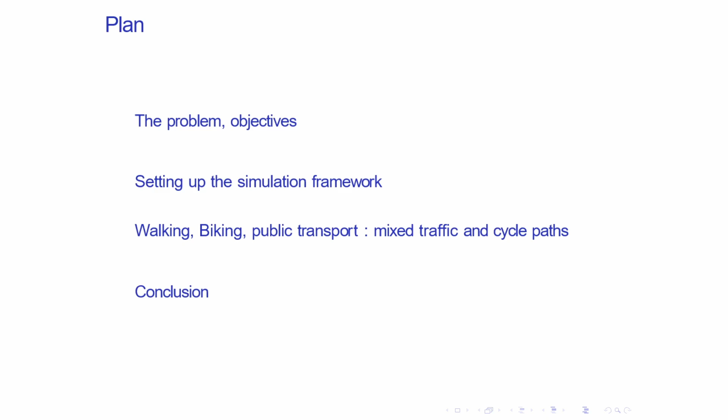So for this study, I will start with the problem and the objectives. Then I will identify the different steps to create a microsimulation transport model. Then I will evaluate the effect of a base case scenario on congestion and of the active modes and the public transport on congestion and emission.

Lately, it has been noticed that the use of private cars became more and more excessive, which makes road transport one of the main sources of fine particle emissions. This is why several cities around the world are regulating the access to the city center, mainly to create low emission zones.

To study this type of problem, nowadays, transport modeling and simulation became more and more valuable tools for planning urban areas. As I'm interested to study the micromobility, including active modes, public transport, and intermodality, the microsimulation has several advantages here.

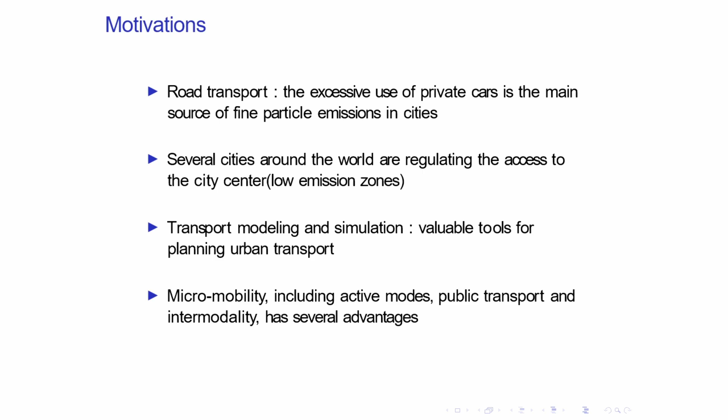Thus far, and at the international level, we have that most urban trips are short distance. For example, in France, 40% of trips are less than 3 kilometers, where 10% are less than 1 kilometer. The use of cars for this type of trips is not desirable, and this is why we encourage the switch from the car to the active modes and the public transport for the short distance, and to combine both of them for the long distance.

They have numerous advantages. For example, the active modes can be a reason to keep good health, they don't create more pollution, and also it's a mode that doesn't need high travel cost. Also, intermodality can be used to encourage public transport users in urban areas, and it can be a feeder of the public transport network in underserved areas. Also, its travel cost is cheaper than using a car.

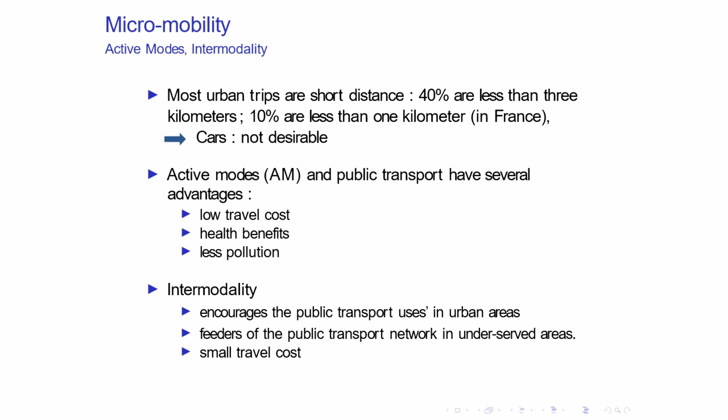So the objective of our study is to set forth the different steps to build a microsimulation transport model as a first step, then to evaluate the effects of a modal shift towards sustainable mobility while integrating an intermodal system. So for this, we will follow the different steps of the framework SUMO to create our base case scenario. Then we will calibrate it, and we will evaluate and compare the different scenarios.

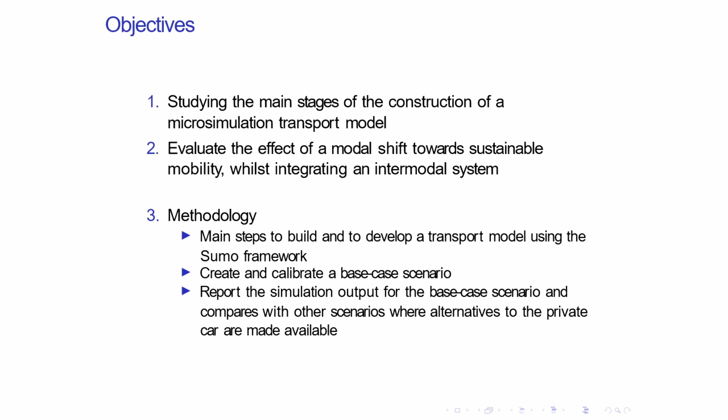So for a comprehensive transport model, this workflow represents the different steps to construct and model a transport model. So we start with the importation of the network. Then we create our demand, and when we talk about the demand here, we talk about the origin-destination matrix. After that, each user should choose their modes, their routes, and also their departure time.

As we know, all users have the same objective, to minimize their travel cost, and this is why they will choose the shortest routes. And if all of them choose the shortest routes, that will create a high level of congestion, especially on the main routes of the cities.

So here, some users can improve their travel time, and here we can talk of a traffic equilibrium. Traffic equilibrium can be realized when some users avoid the main roads of the cities and use the links around the cities. And this step will be repeated until the model is calibrated. Then we can use it to examine different scenarios.

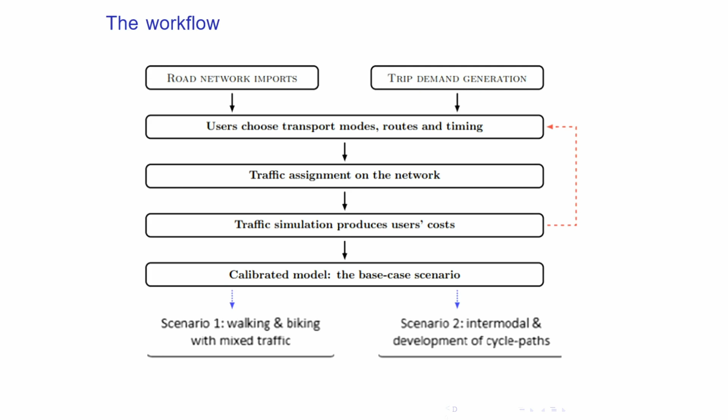So for this study, we choose to work with spider cities because I'm interested in European cities, and as we know, European cities are considered spider cities. So this network is adapted from the city of Mons in Belgium. And when I say adapted from Mons, I mean the size of the city's network, where the area here is equal to 146.6 square kilometers.

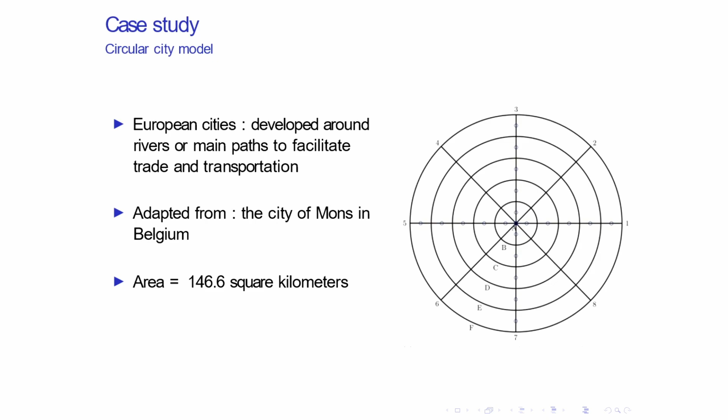As we have seen in these figures, in this network there are 5 circumferential roads and 8 radial roads, and I use netgenerate to import this network.

But we can also use different tools to create or import this network, for example, to create manually the XML files of SUMO, or to create it with netedit. And also we can use an external script, for example, OSMnx of Python, to create this network.

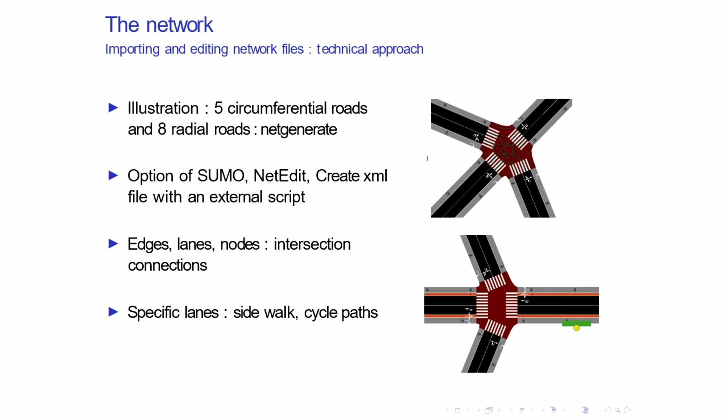So after importing the main edges, we can also modify it by adding some connections or some specific lanes, like the sidewalks and cycle paths, and also we can add the bus station. So, now we will pass to how we generate the trips.

So to generate the demand of these models, we use gravitational-like models. And when we talk about gravitational-like models, as we move away from the city centers, the frequency of activity will decrease, and the frequency of households will increase. Also, we have created four bus lines in the main roads, and 4 transport modes were taken into account: walk, bike, public transport, here we talk about the bus, and the private car.

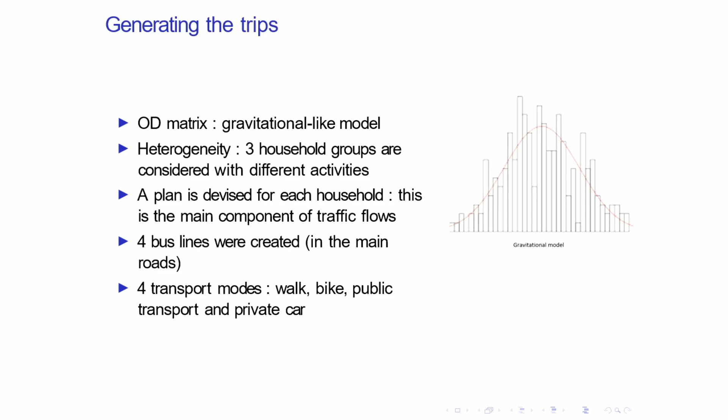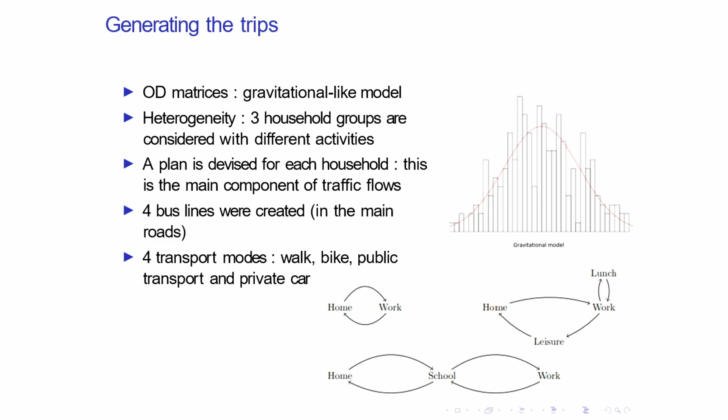Also, 3 groups of households were taken into account in these models: home to work, and home to school to work. Here I'm talking about, for example, a couple who should take their children to school before work. And the 3rd group is home to work, with another activity after or before work. This screenshot exhibits the multimodal transport with the cars, buses, and pedestrians.

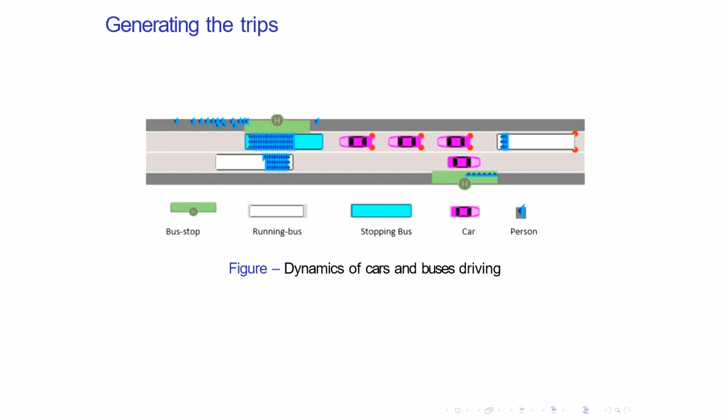So, in this simulation, we create 10,000 car trips, and we simulated during 4 hours. And for choosing the shortest routes, here we use the duarouter tool of SUMO. And as we say, the choice of the shortest route can create high-level congestion, and to calibrate this situation, we have the choice between the tools one-shot and duaIterate.

In this study, we use the one-shot tool because here we are talking about a virtual city and not a real city. But I think, and what I'm working on now, for the real city it will be better to use duaIterate. After calibrating this model, the model is particularly flexible, and the input data can be quickly adjusted to produce new outputs.

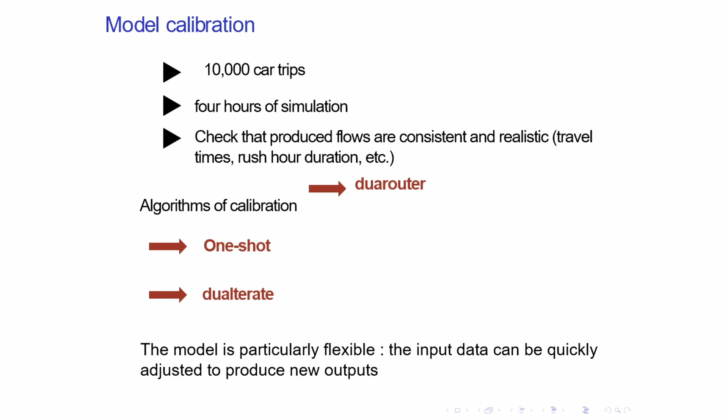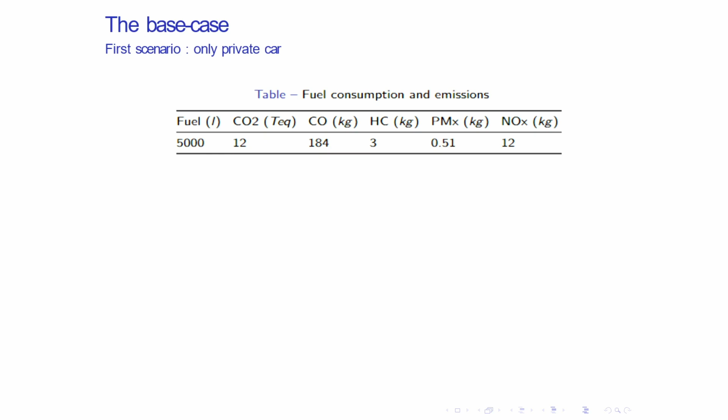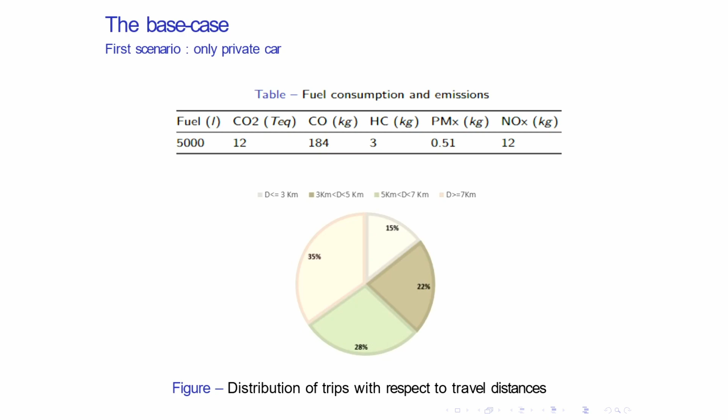So, as I say, I'm interested in the emissions and congestion output, and this is why this table summarizes the fuel consumption and emission gases for the base case scenario. And also, I found that more than 30% of trips here are less than 5 kilometers. And as I said at the beginning, the use of cars for this type of trip is not desirable. This is why I propose a second scenario to switch to walking for the short distance, and intermodality, which combines walking with the bus for long distance.

And to calculate the probability that a person will switch to the alternative modes, I use this logistic expression, where A and nu are positive parameters, di is the travel distance and d0 is a distance threshold. With this expression, the lower the travel distance, the higher the probability car users may be likely to switch to the alternative modes.

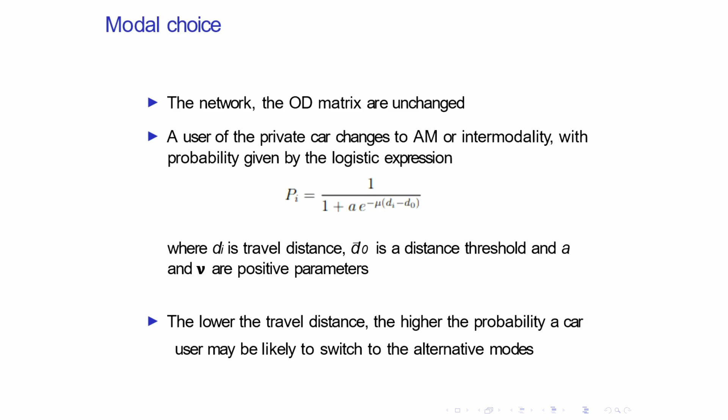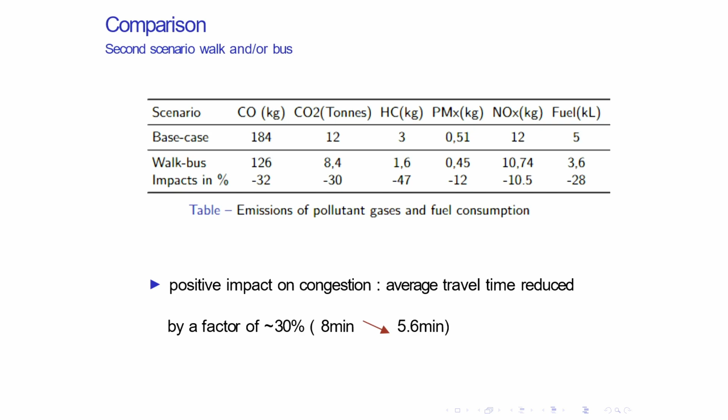And for this scenario, for the congestion results, we have many factors which we can take into account. Here I have the average travel time, and we can also take into account the average speed or something like this. So in this scenario, the average travel time decreases by approximately a factor of 30%. It decreases from 8 minutes per vehicle to 5.6 minutes per vehicle.

So as a third scenario, here we included bike. So biking for the short distance, and biking and bus for the long distance.

Based on the expression of the logistic model, in this scenario, we will have 30% of cars switch to biking and bus, 10% switch to walking and bus, 8% to biking, and only 5% to walking.

So when we talk about intermodality, combining biking and bus, here we have the problem of bike parking. In this model, we assume that there is a bike station near the bus station, and I will show you later in a small video how I assumed it.

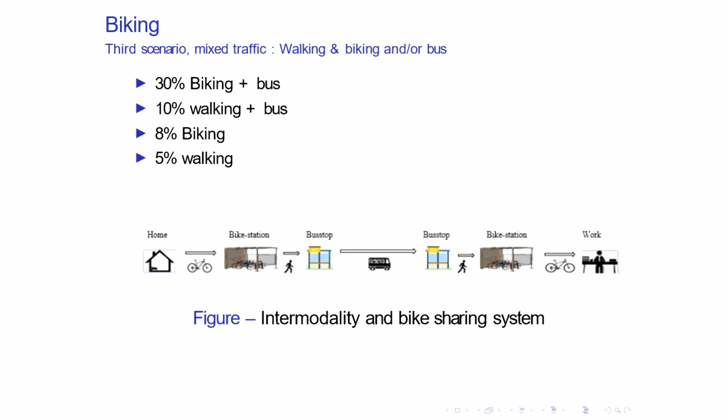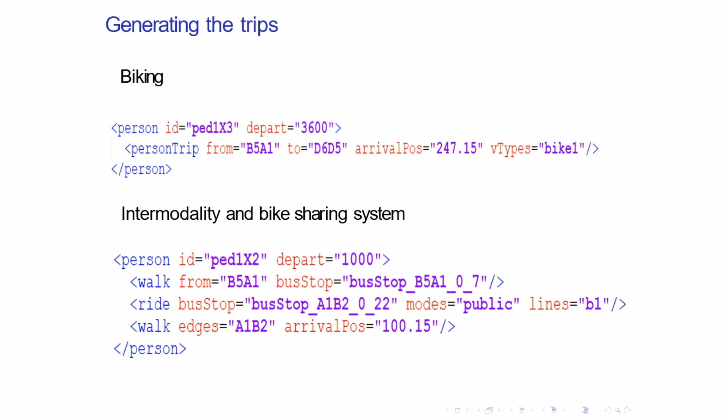This is a small video, but it doesn't work. I don't know why it doesn't work. Oh, okay.

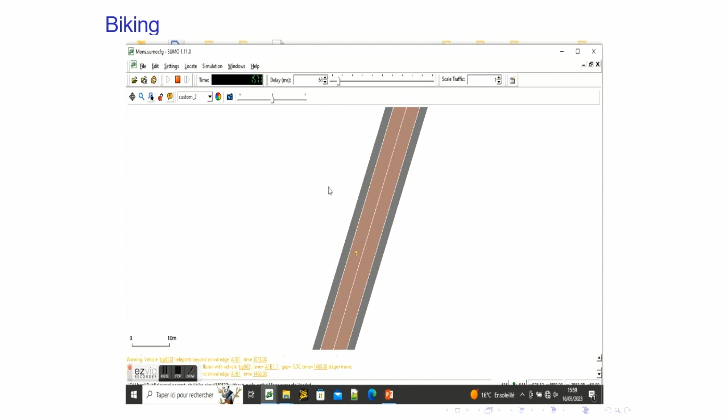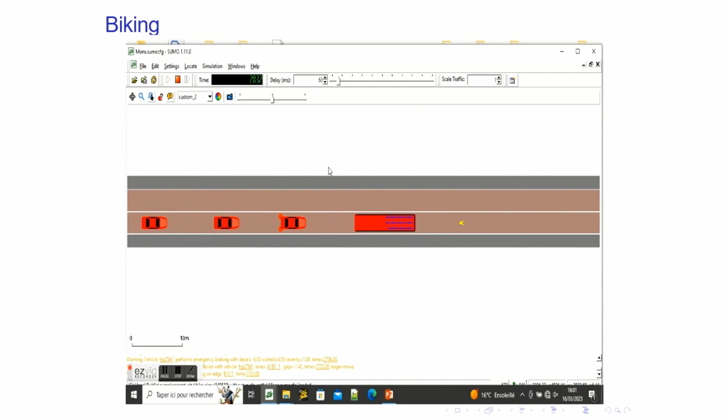So here the user stops for some seconds, and here we assume there is a bike station, because until now I think there is no tool for how to add a bike station in SUMO near the bus stations. If we follow it, he will wait for the bus.

And now this is normally the second bus station, the bike station that we assumed, until he arrives at the approach station of the destination.

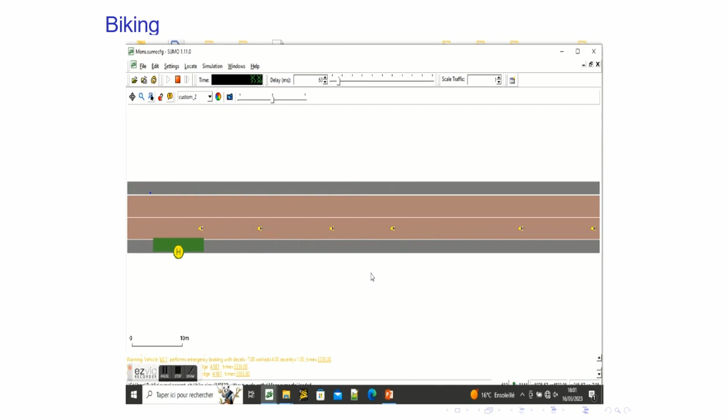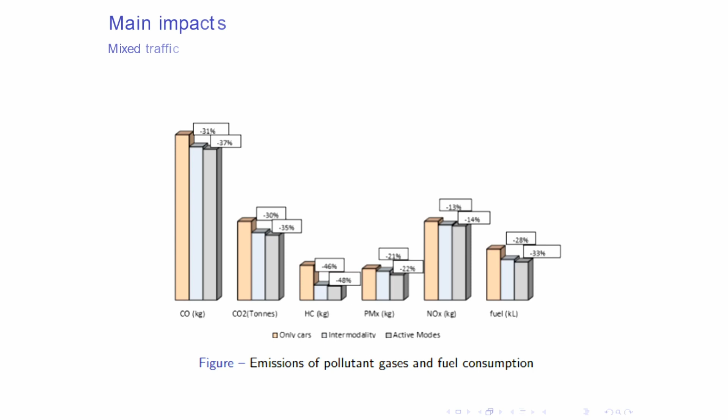And so the results of this simulation showed that biking can also be a tool to decrease the high level of congestion and also the emissions and fuel consumption.

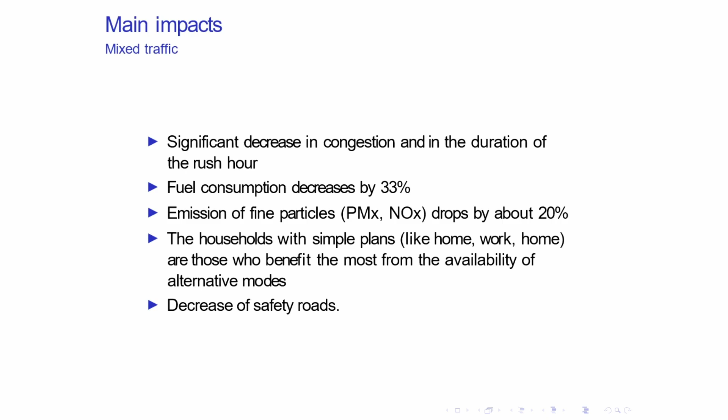But when bikes and cars share the same roads, and recalling the literature review we have on bicycles, this can increase the risk of accidents in the network or on the road. And this is why we proposed, as a fourth scenario, to include a cycle path.

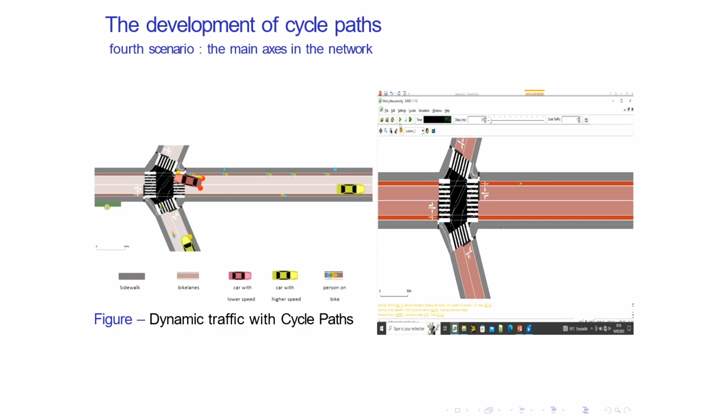But the idea here is to include cycle paths in the main roads of the cities, and the main goal is to improve road security.

But when we show the emissions and fuel consumption results, we found that bicycle lanes or cycle paths can also decrease the high level of congestion. As I said, I included them in the main roads of cities, so it can decrease congestion there, and also decrease the level of pollution and fuel consumption, as shown in this table.

For example, for fuel, in the first scenario it decreased by a factor of 28, and in the scenario with the cycle path it decreased by a factor of 41.6. It's similar for the other emission gas factors.

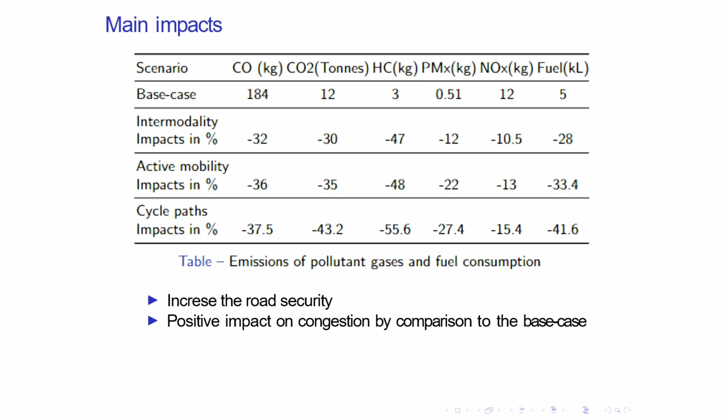So to conclude here, by this study we found that microsimulation is possible for cities of medium size, and this is what I'm working on today for my thesis.

I'm working on the same models, but now I'm not importing just little cities like this—I'm working on the city of Dunkirk in France.

This model can also provide us interesting insights for policies with large innovations. Also, we can conclude that active modes and public transport can significantly reduce the total travel cost.

When we talk about total travel cost, I want to take this into account—I didn't calculate it, but it's possible to do it. Here I will include the price of fuel and the price of emissions, because on international websites there is the price of these factors. So it's possible to calculate the total travel cost.